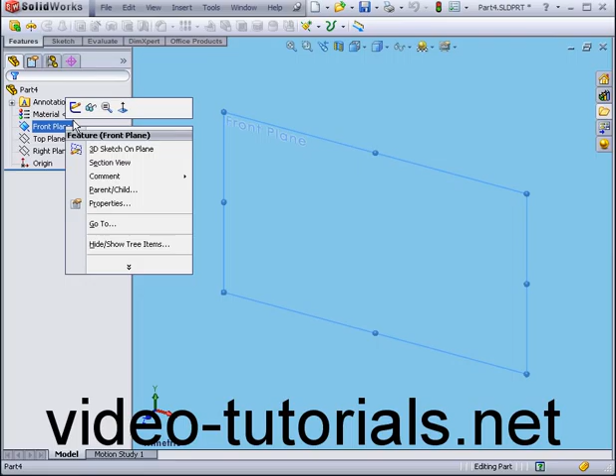First, I'm going to right-click, select Insert Sketch. Now let's activate the Line tool, and let's create a shape.

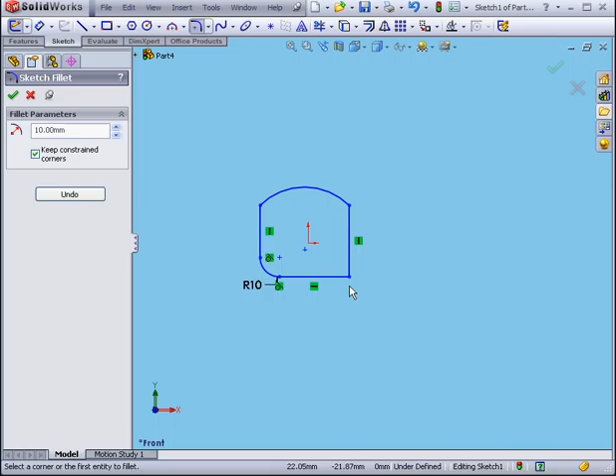Right-click, select. Let's use the 3-point arc tool now. Something like this. Right-click and select. Now let's apply some sketch fillets. A 10 mm radius will be fine. Let's accept.

Now let's use the rectangle tool to create a rectangle. Under Options, let's check For Construction. Click OK.

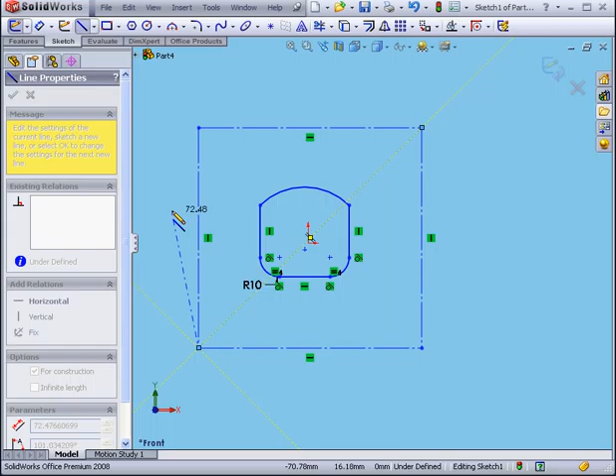Activate the Center Line command. Let's create a construction line between these two corners. Right-click, select. Next, Control-select the center point and the center line. We'll add a midpoint relation. Click OK.

The origin point is now located at the center of the rectangle. Now we're going to apply some dimensions. This dimension will be, let's say, 100 millimeters. We'll make this one 120.

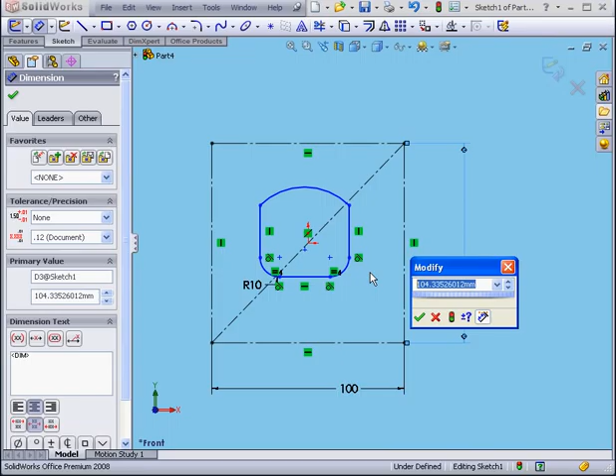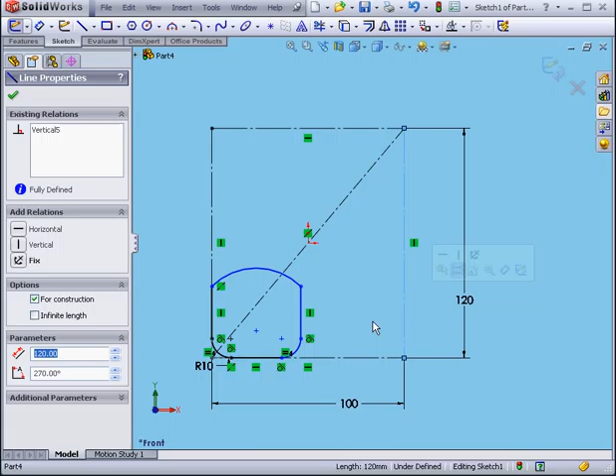Now let's Control-select this line, and we'll add a collinear relation. Click OK. This line, and Control-select this line. Collinear. OK. This line, Control-select this line. Again, a collinear relation. OK.

Now we'll select the arc and this line. We'll add a tangent relation. Click OK.

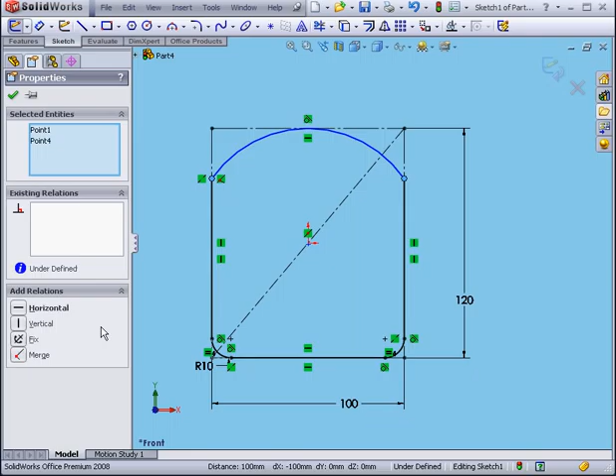Control-select these 2 points. Add a horizontal relation. OK. Let's add one more dimension. We'll make this 95 millimeters. Tab OK. Right-click and select.

You see in this case that the construction geometry helped us fully define the sketch and also helped us to see how the geometric relations in the sketch were created.

Okay, let's create a circle. Right-click, select. Let's dimension our circle. We'll give it a 12 millimeter diameter. Okay.

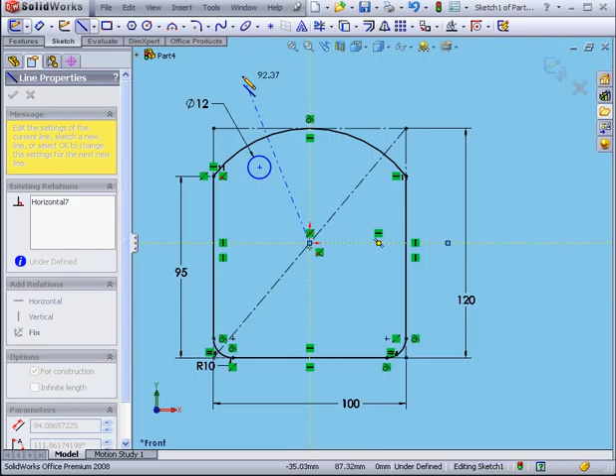Right-click, select. Let's use the Center Line command again. Right-click, select. And let's dimension it. We'll insert an angular dimension here. 112 degrees. OK.

Right-click, select. Now let's Control-select this line and the center of the circle. Let's add a coincident relation. Click OK. Let's add one more dimension from the center of the circle to the origin point.

You see here that the dimension moves based on where my mouse is hovering. When you're satisfied with the dimension's orientation, right-click and the dimension becomes locked. You'll see the lock sign on the mouse. If you want to unlock the dimension, just right-click again and the dimension becomes unlocked.

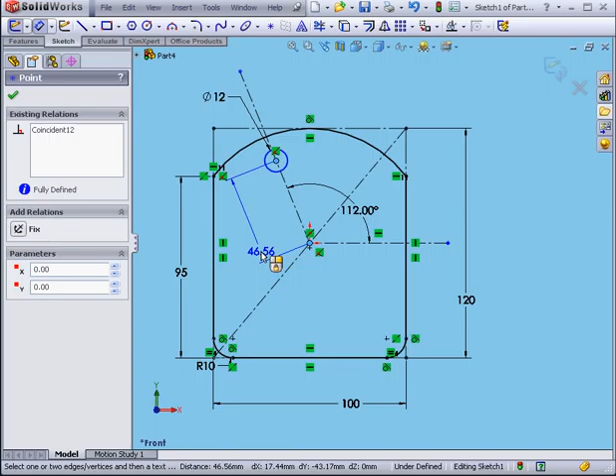Again, let's right-click. And left-click when you're satisfied with the position of the dimension. Let's enter 45. OK.

Right-click, select. Now let's delete this angular dimension. Activate the Point tool. Let's drop a point right about here.

Right-click, select. Let's say I want the position of this construction line to be driven by the distance along this line from this point. Let's activate the Smart Dimension tool.

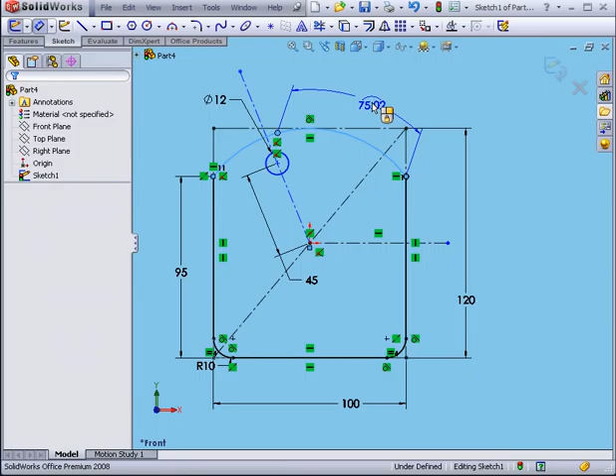Select this point, and to create a dimension along this line, select this line. Left click. Let's say the distance is 75 millimeters. OK. Right click, select. Now I'll control select this point and this line. Add a coincident relation. OK.

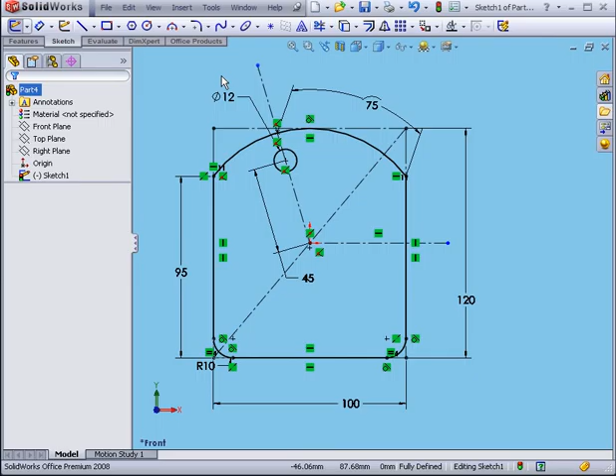This is another example of how to use construction geometry to constrain and better visually understand your sketch. Let's exit the sketch.

Activate the extrude tool. Something like 3 millimeters. OK. This concludes our tutorial on using construction geometry.